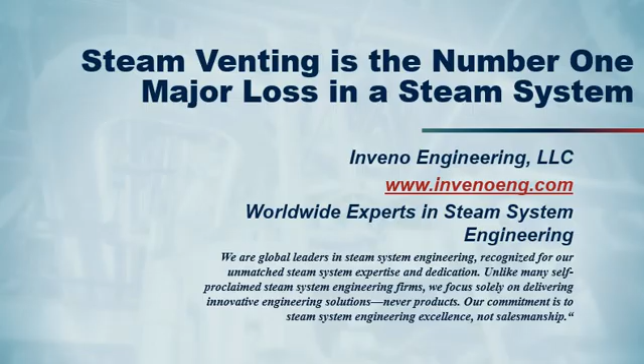Today, I want to talk about steam venting, which is the number one major energy loss in a steam system. Unfortunately, a high percentage of steam operations vent steam to atmosphere. There is no reason to vent steam to atmosphere with today's technology and operation. Venting steam is the number one major loss of energy in steam and condensate systems. Plant personnel always ask, "We want to optimize a steam system." Well, stop venting steam to atmosphere from the condensate tanks.

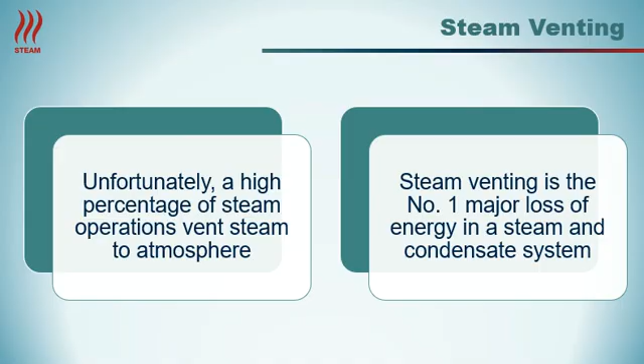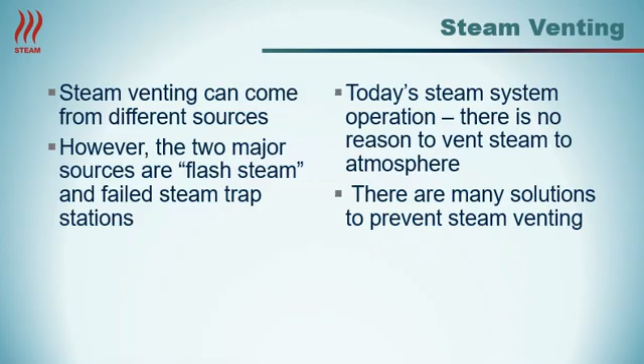People ask about steam venting. Where does the steam come from? There are two different sources. One source of steam is that plants have a tendency to vent flash steam, which is a normal occurrence in a steam system, and the other one is failed steam trap stations blowing steam into the condensate system. Both steam sources will typically go to a vented condensate tank and then vent the steam to atmosphere. In today's steam system operation there is no reason to vent steam to atmosphere. There are many solutions to prevent steam venting and achieve optimization and energy reductions.

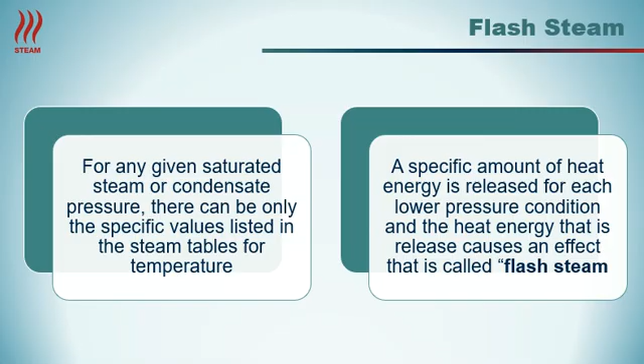A note on flash steam: for any given saturated steam pressure, there can only be a specific value listed in the steam tables. Condensate temperatures have a specific amount of heat energy that is released for each lower pressure condition. The release of heat energy results in a phenomenon known as flash steam. Now that flash steam is going into the condensate return system, and typically it goes to a condensate tank that is vented to the atmosphere.

Example on flash steam: 100 psig, 338 degrees. Steam coming into the heat exchanger, 338 degrees. When latent energy is released to the product inside the heat exchanger, the condensate temperature is also 338 degrees. Condensate passes through the steam trap, then into a condensate line. Let us say the condensate line is operating at 0 psig or 212 degrees. The condensate cannot exist at 338 degrees. The condensate has to get the temperature from 338 degrees down to 212 degrees, and it does this by a percentage of liquid changing from a liquid to a vapor.

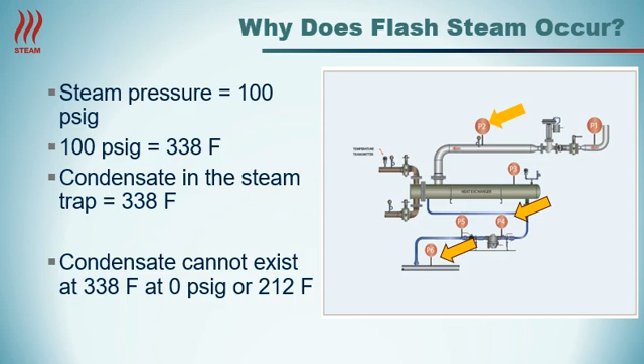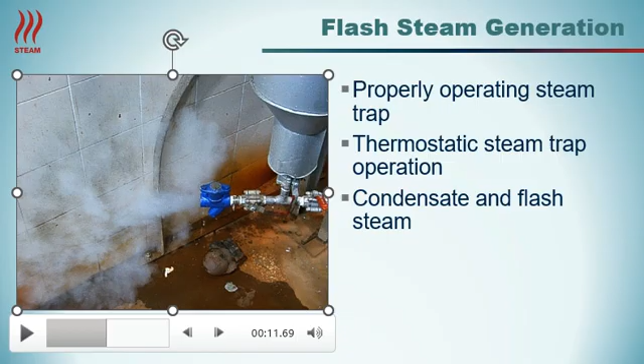An operating steam trap would be like this steam trap, which is discharging. You will see the small percentage of liquid and the great amount of flash steam. The steam trap is working correctly. This is a thermostatic design steam trap with on-off operation and has a large amount of flash steam going into the condensate return system, which we do not want to vent out to atmosphere. If we vent steam into the atmosphere, unfortunately, it will heat up the ducks as they fly by the plant. But anyway, it's the number one energy loss in a steam and condensate system.

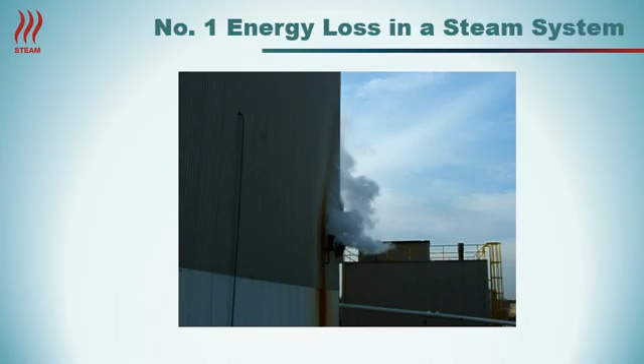A note: when you come to your plant operation, look at the number of steam vents that are venting steam to atmosphere. A review of flash steam generation: high-pressure condensate with a high energy content is discharged through a steam trap or control valve to a lower pressure system. The condensate liquid temperature must be at the same saturated condition as the lower pressure system, thus flash occurs. High-temperature condensate passing through a drain device, such as a steam trap or control valve, is introduced into a lower pressure system and has to liberate a small percentage of flash steam.

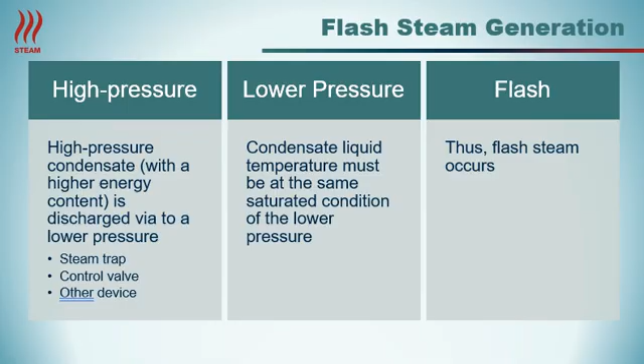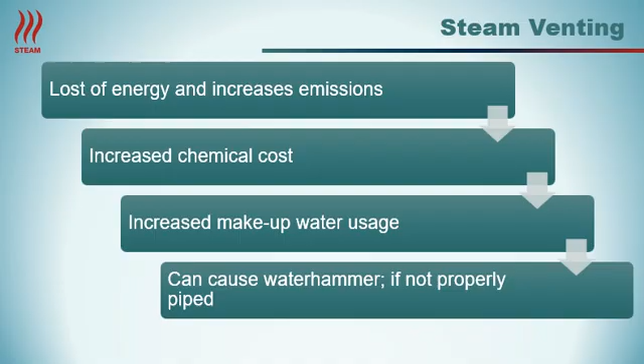The plant that is venting steam has a loss of energy and increases emissions. We always talk about being a green operation. If you want to be green, stop venting steam to the atmosphere. The next thing, it increases chemical costs because every 1 pound of steam being vented to atmosphere is 1 pound of condensate, which is equal to 1 pound of makeup water that has to be increased in temperature to the boiler operating steam temperature. Makeup water also increases chemical cost and boiler blowdown, which are additional costs. The other negative result is it can cause water hammer if it's not properly piped in the system.

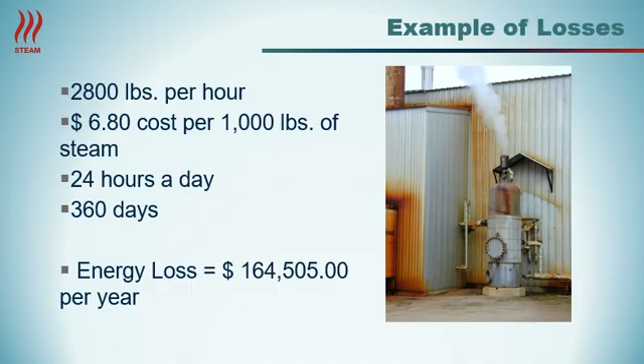Example of energy loss: you drive by these condensate tanks all the time. They're venting steam to atmosphere. The condensate tank has a 2,800 pounds per hour steam loss. The average cost of steam today is $6.80 in North America per 1,000 pounds of steam. So, 24 hours a day, 360 days a year. Therefore, you take 2.8 times 6.8 times 24 times 360, which is equal to a loss of $164,505 per year. This one steam vent is $164,505 per year.

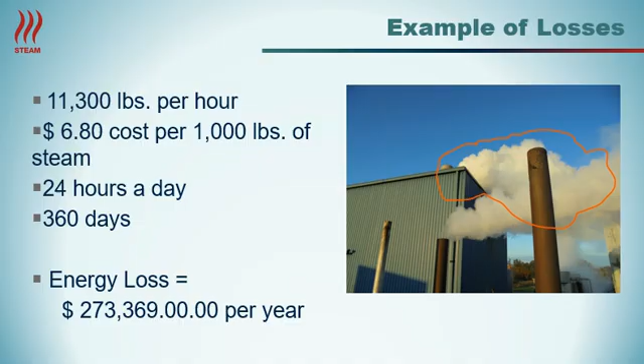Example of another energy loss. The circled steam vent in the back of the picture is 11,300 pounds per hour. The calculation is $6.80 per thousand pounds, 24 hours a day, 360 days. The calculation would be 11.3 times 6.8 times 24 times 360, and that is equal to $273,369 per year. This one steam vent is almost $300,000 per year. This plant is trying to heat water for the plant operation. No, it just shows you how erroneous venting steam to atmosphere can be. So therefore, we want to eliminate steam venting from the condensate or flash tanks.

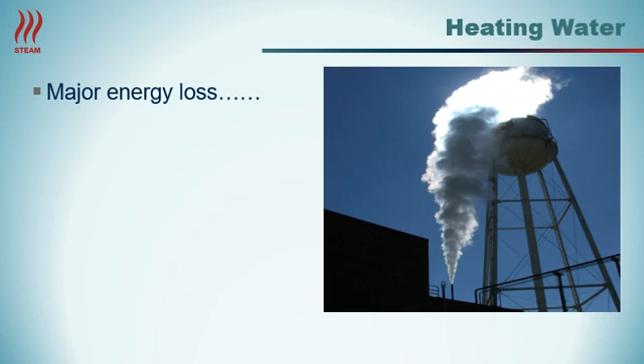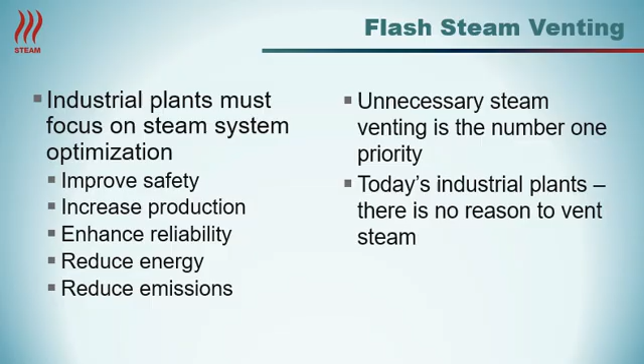Industrial plants today must focus on steam optimization, improve safety, increase production, enhance reliability, reduce energy, and reduce emissions. Unnecessary steam venting is the number one priority. In today's industrial plants, there's no reason to vent steam to atmosphere. The question is what happens on Monday. To improve the steam system, change must occur. What we did in steam systems 20 years ago is not what we do today. Maybe 15 years ago, we vented steam to the atmosphere. Today's standard in steam systems is no venting steam to atmosphere.